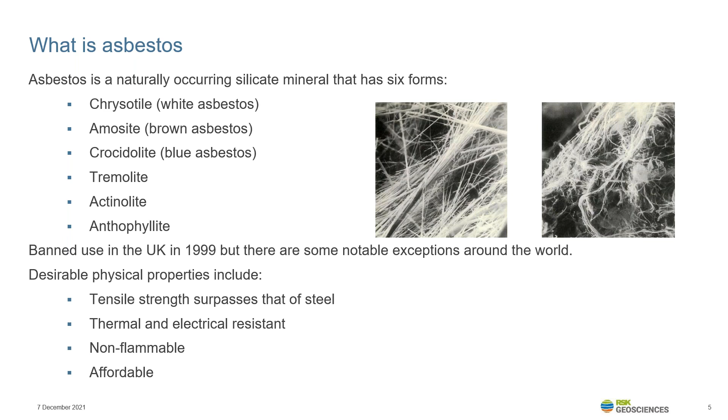chrysotile continued in such features as Artex until its ban in 1999. However, asbestos is still used around the world, for instance in the US, where it seems the financial benefits of using asbestos in cement pipes, for instance, outweigh the health effects. Asbestos has been so popular throughout history and is so widely found today because of its desirable physical properties, which include its good tensile strength, thermal and electrical resistance, fire retardance, and it's a cheap commodity.

So asbestos is a carcinogen, meaning that it's an agent directly relating to cancer. There are three main types of asbestos diseases caused by exposure to asbestos: mesothelioma, which is a cancer of the cells outside the lining of the lungs, and lung cancer, which causes malignant tumours in the air passages of the lungs.

And asbestosis, which is scarring of the lung tissue marked by severe fibrosis. There becomes a risk to human health only when asbestos is disturbed and the loose fibres become airborne, and they enter the respiratory system through either inhalation, ingestion, or direct skin contact.

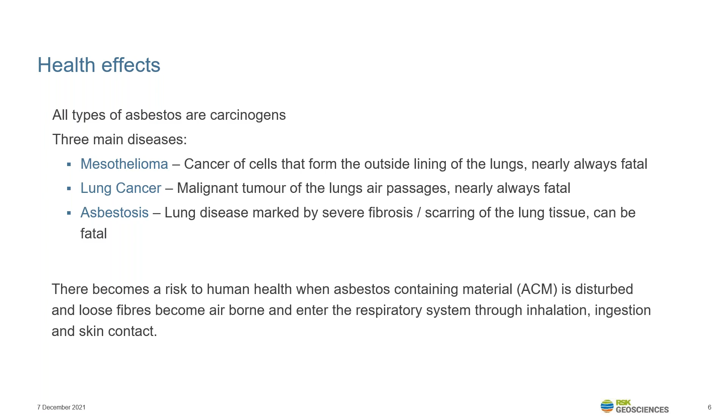So the following legislation all relates to safeguarding employees from encountering asbestos, asbestos-containing materials, during their day-to-day working lives. The Health and Safety at Work Act of 1974 is the primary piece of health and safety legislation in the UK, and it's what governs our methods of work. From this Act, there are several regulations which are part of UK law and place duties on both the employers and the employees to adhere to all safety measures and procedures put in place.

The regulation that relates specifically to asbestos is the Control of Asbestos Regulation 2012. It includes land as a premises, and therefore asbestos in soil is now considered within this regulation, hence the growing involvement of environmental consultancy firms in protecting this particular workforce.

Other guidance documents for use specifically relating to asbestos in soil are produced by various scientific bodies. CAR Soil, produced by CLAIRE in 2016, provides an interpretation of how the regulations within CAR 2012 apply specifically to works associated with asbestos-contaminated soil and construction and demolition materials. It provides guidance on how to implement the requirements of CAR 2012 in relation to site investigations and remediation activities, including a couple of useful decision-making flowcharts.

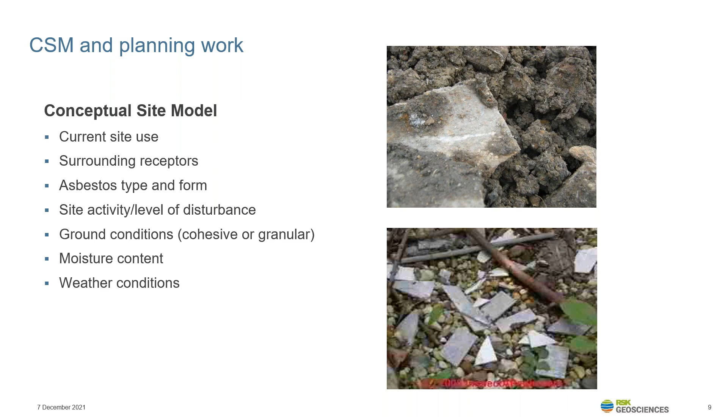Ground conditions should be characterised. Soil that's more cohesive in nature tends to bind asbestos fibres to it, and it's not as easily released. This is also the case with moisture content - water content dampens down the fibres and makes them less releasable, which is also linked to weather conditions. So wetter weather, as you can imagine, dampens down the soil even further, limiting the releasability of the fibres.

So once we have a conceptual understanding of the site, we can then move on to the desk study element to further investigate the potential presence of asbestos. So asbestos-containing materials have been used throughout history in many forms and for many purposes, especially within the construction industry, due to the desirable properties that we talked about earlier.

It reached its peak usage in the UK in around the 50s and 60s as part of various building fabrics. Therefore, it's bound to be present on most, if not all, brownfield sites that we come across today. And that's mainly because the sites we deal with generally contain dilapidated buildings or war-damaged buildings. They've undergone several phases of demolition. There may be deposits of made ground in basements, for instance, and they may have undergone some sort of importation of soil from an unknown source, or even fly tipping.

We're talking about brownfield sites, but we can't rule out the presence of asbestos on greenfield sites as a buried waste. Many old farms contain barns and outbuildings that may have poorly maintained asbestos roofs and walls, and they may also contain fly tipping or burial of asbestos-containing materials.

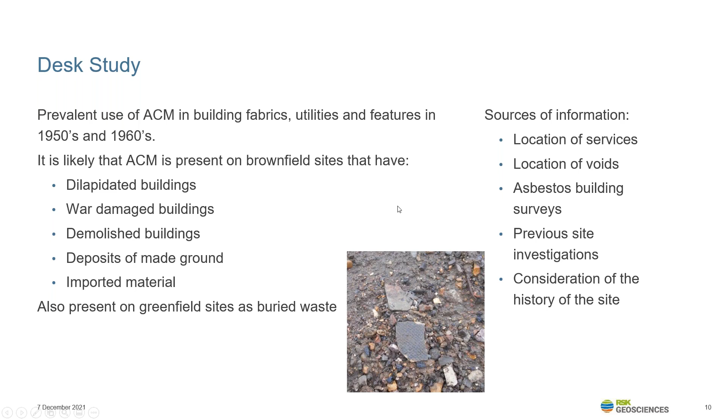Consideration of the history of the site is also extremely useful. Landfills and railways, for instance, are higher-risk sites for asbestos than, for instance, a greenfield site.

The site walkover is a fundamental stage in the conceptualisation of a site and site investigation prep for any contaminant. During a site walkover, it's necessary for all site staff to do certain things which can be taken forward in the risk assessment, such as inspecting the ground surface, any stockpiles of material or fly tip material, and inspecting existing buildings for suspected asbestos.

These instances should be noted on a site plan as suspected, as it's not always the case that we've proven it's asbestos at that stage. On the plan, we should note the location, form, extent and quantity of asbestos we suspect, and also its degradation status, so how well maintained it's been over the years.

Take ample photographs, which is always a necessity for any site walkover, and also note any areas that were not inspected on a site plan, as these may prove to be places where asbestos is present at a later date.

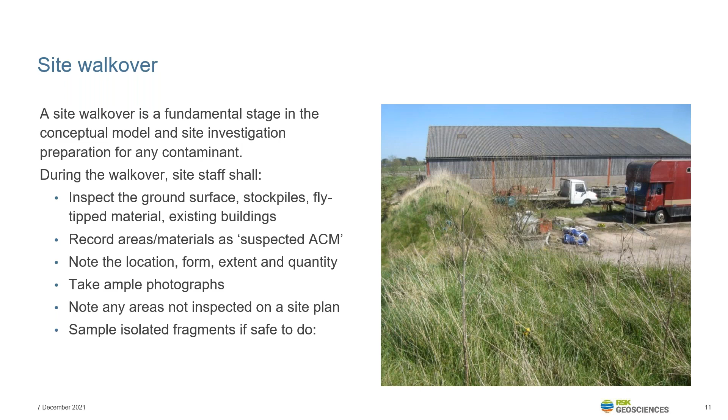We don't readily do it, and there are arguments to support not doing it at the walkover stage, but suspected asbestos may be sampled during a site walkover if it's safe to do so, and we have the correct equipment and PPE.

The site walkover and desk study information can then be used to facilitate the site work planning stage and the production of site-specific risk assessments and health and safety plans. They can also be used when considering the suitability of certain exploratory techniques. For instance, air flush drilling should not be used when drilling through made ground suspected of containing asbestos.

The licensing and notification processes also need to be considered at this stage when planning site work. Generally, there are three types of asbestos work: notifiable licensed work, where it's suspected that the control limit for exposure to asbestos fibres is potentially exceeded, and there is licensable product likely to be on site, such as asbestos insulated board.

Notifiable non-licensed work, which is dependent on the type of work being undertaken and the type and form of asbestos. In this scenario, measures in line with the licensing scenario, where a licensed asbestos contractor is needed, do not apply, but notification to the HSE will need to be done. The third scenario, applicable to most site investigations and sampling exercises we undertake, is non-notifiable, non-licensed work.

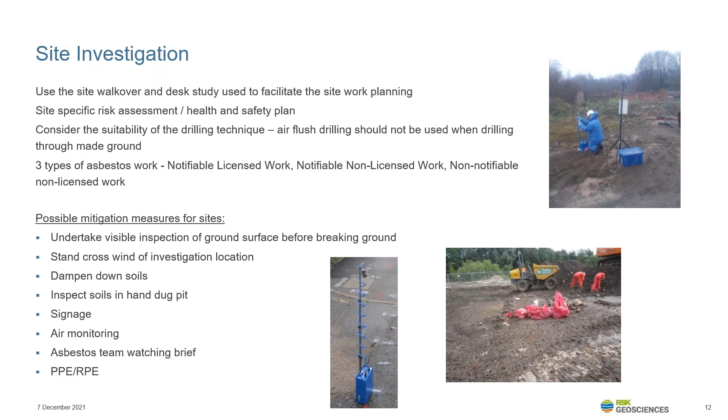RPE and PPE are considered to be the last line of defence, and other control measures should be put in place to minimise fibre release, such as dampening down soils, as we've previously discussed.

RPE, respiratory protective equipment, includes the use of a half-face respirator with a P3 filter. These require face fit testing, so they're specific to the person using them. A full face positive pressure mask with a P3 filter can also be used, again requiring face fitting. Both of these masks require the user to be clean shaven so that the seal between the face and the mask is tight.

PPE includes the use of a disposable paper overall, usually a Tyvek Type 5 or 6 coverall, latex gloves or nitrile if required by the user, and disposable overshoes or Wellington boots. These are used so that they're easily washed off and any fibres don't become entrained in the shoelaces.

On the screen now is a general setup of a site investigation that we've done on a site impacted by asbestos.

As you can see, we've got a water bowser on hand to dampen down the soils, and also clean off any tools that have been used or drill casing so that we reduce the amount of cross-contamination.

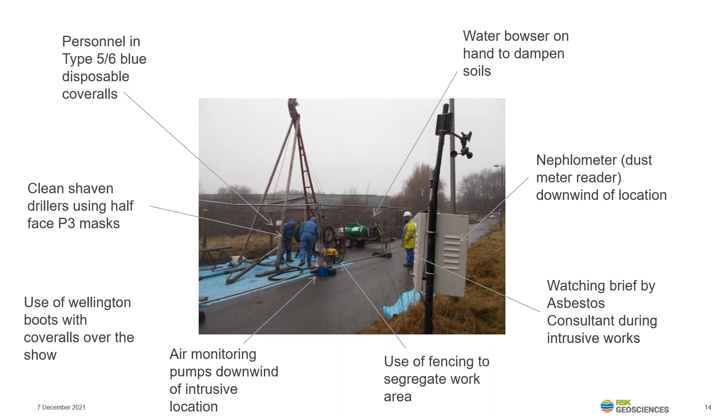Following on from this, we've just got a quick project example: an environmental and geotechnical site investigation at the former Turner Brothers asbestos factory in Rochdale. It's a derelict asbestos manufacturing and processing plant set up in the Spodden Valley.

There's a woodland to the north and to the west, and there's a public footpath that runs right through the site from north to south. The actual factory buildings are in the centre of the site, which are currently structurally unsafe.

Raw asbestos was imported via the railway in the north of the site and was woven and processed at Harridge Mill, which was in the north in the woodland. Any excess asbestos containing product or waste material was literally dumped in the woodland down the slope and ended up either on the slope or in the Spodden River.

There's been several phases of investigation over the years, and there's also been some remediation done in the late 90s. But because of erosion and slope instability, trees have fallen down and there've been several instances of animal burrows, bringing a lot of the asbestos waste products to the surface. Being in a public area, it's of great risk at the moment.

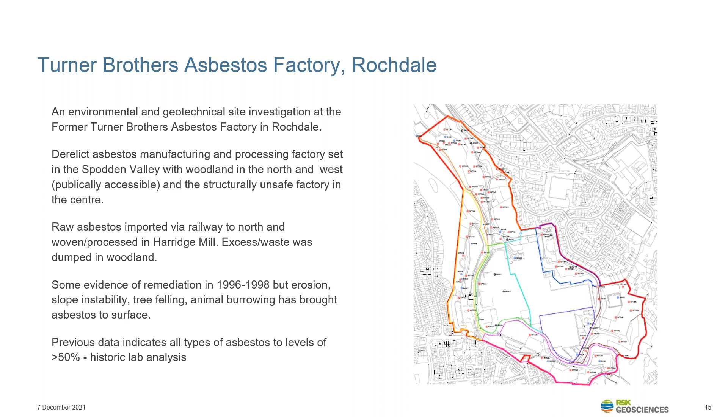We were tasked with undertaking a site investigation to ultimately feed into the end development, which is hopefully going to be a residential development. We put in place several mitigation measures, which are listed here. The RSK asbestos team was on site at all times to watch what was coming out of the soil.

We notified the investigation to the HSE just because of the type of asbestos we were encountering. We did a site walkover prior to the investigation, and all site personnel wore PPE and RPE.

We did some background monitoring to see what the air conditions were like prior to breaking ground, and then we did reassurance and personal air monitoring throughout the investigation. We dampened down the soils and chose to undertake the investigation in winter, so it was a lot wetter. We cleaned off all the equipment between locations.

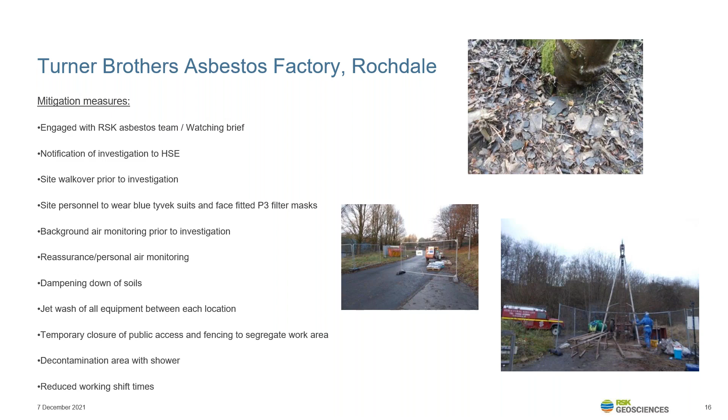We tried to close off the site from the public, but only got temporary closure, so we had to segregate the work areas. We also set up a decontamination area, a shower that all personnel on site had to go through at the end of each working shift.

Following that example, I want to talk about this joint industry working group, the freely available Excel-based support tools produced a couple of years ago to assist with risk assessment mitigation measures. The tool is a series of Excel tabs, and on the first one it allows you to input site-specific details about ground conditions, asbestos type, and air monitoring results, for example.

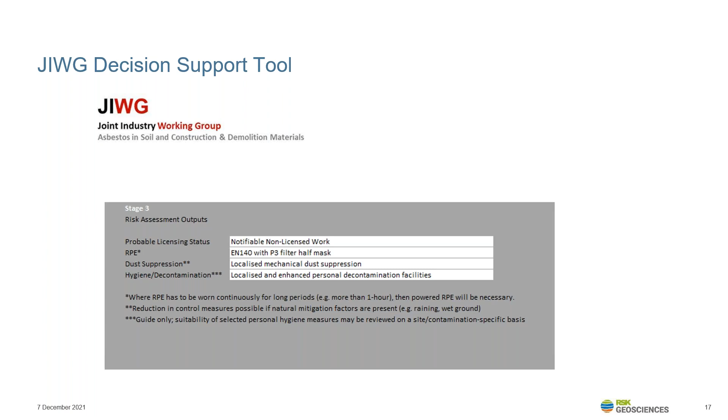It then outputs in this format you can see on screen, giving you a probable licensing status and an indication of the level of RPE recommended, and whether or not dust suppression or decontamination is recommended. They're very useful tools and freely available, so I'd recommend having a look into them.

Moving on from the site investigation stage, we'll now talk about remedial techniques, of which there are many when it comes to asbestos containing soils.

So the first option is to leave it in situ. This is likely to apply when asbestos containing soils are at depth and the public or future contractors are unlikely to come into contact with it. But it's key to consider if future excavations are required in these areas, such as for foundations or for maintenance purposes.

Consideration should also be given to future site usage, so it may not be appropriate to leave it where human contact may occur, such as in residential gardens and utility corridors. In this scenario it would be prudent to use a capping layer, which includes a visual warning or a hard-to-dig layer, for instance.

The leave-in-situ scenario means there is a presence of asbestos on site, and this needs to be documented in an asbestos management plan and undergo agreement from the regulatory agencies.

Moving on to a cover system, which we briefly talked about just then - this is where a clean imported non-asbestos containing material, more often than not with the use of a Terram, as pictured in the top image, is placed over asbestos containing soils. There's no statutory minimum depth, but it depends largely on regulatory approval and the risk assessment, so it can range from 150 millimetres up to 2 metres in some instances.

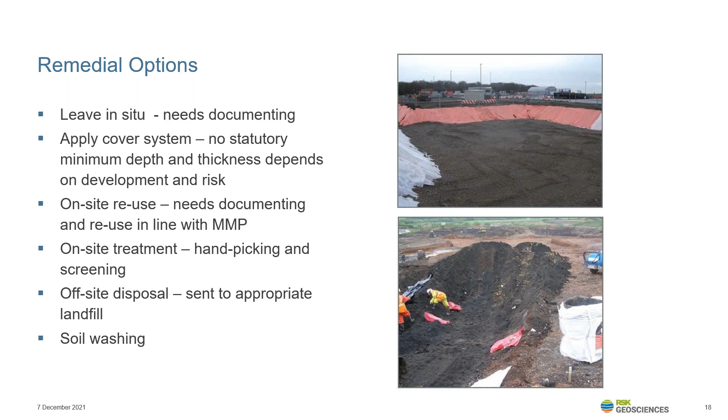Soil washing is an option. I've not heard much about this and haven't seen it in action, but I know some companies do it, whereby they rinse the soil of asbestos fibres. It's largely effective on granular soils, but it does leave an issue of potentially impacted wastewater and waste arisings.

Some of the control measures to be put in place during remediation are very similar to those put in place during the site investigation. You need trained and competent personnel, and you need to demarcate and separate the asbestos removal area as part of an exclusion zone. All personnel should use PPE and RPE as required.

There needs to be proper decontamination of equipment, including vehicles, so having wheel washing locations set up around the site, and having designated entry and exit points, so a one-way system, makes it a lot easier to control. Signage, as we've already said, and consideration for adjacent site users, and monitoring. The monitoring is quite useful to be done in the remediation stage around the site perimeter, but also on personnel who are actually removing the asbestos. And there should be a final inspection by an asbestos surveyor and sign off for re-entry.

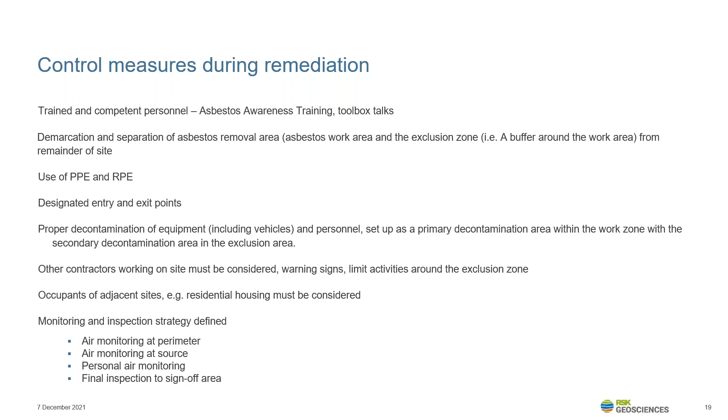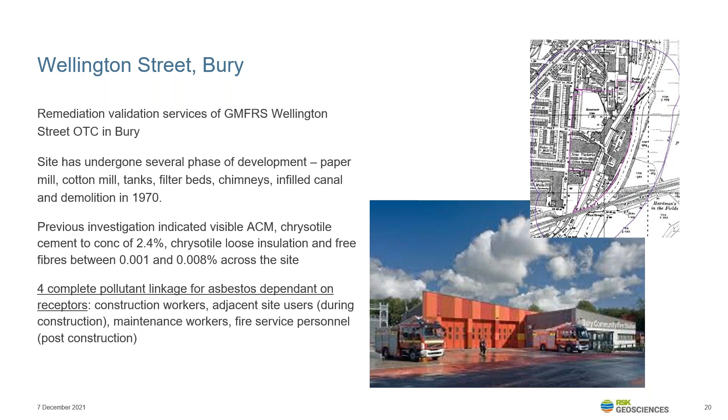A quick example of a remediation project we've recently been involved in was at the Greater Manchester Fire and Rescue Service, their new training facility in Bury. The site had undergone several phases of development before finally being demolished in the 70s. Previous investigations indicated visible asbestos in the form of chrysotile cement, loose insulation and free fibres across the site. So we were tasked with undertaking remediation so that construction workers and future site users and maintenance workers would be safe during the ongoing usage of the site.

On-site activities during remediation included a licensed asbestos removal contractor riddling and handpicking the visible asbestos pieces, and we decided to exclude certain zones as red areas where only certain personnel could enter who were wearing full RPE and PPE. We undertook boundary air monitoring and also personal air monitoring on these workers. We dampened down the soils and undertook regular moisture content testing throughout the lifetime of the removal works. We also undertook a phase of validation soil sampling so that as much of the material could be reused as possible.

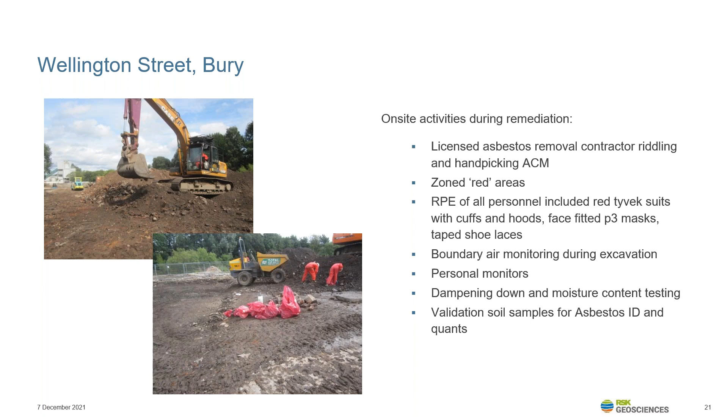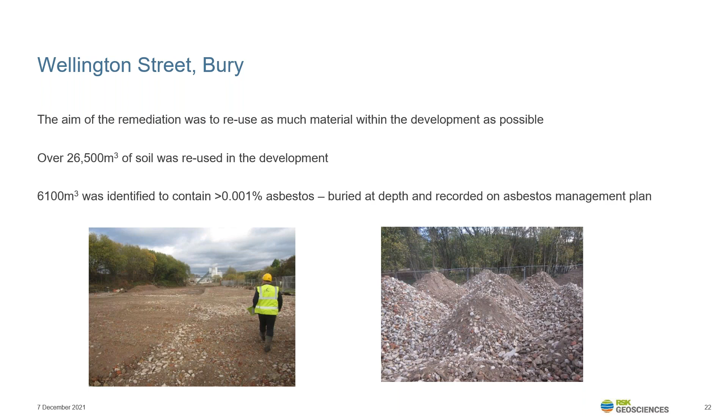So just to summarise, the legislation applies to all work with asbestos, including that undertaken with soil. CAR soil provides some clarity on how the legislation applies specifically to working with asbestos in soil. It's important to understand the conceptual site model in setting up your risk assessments. The Joint Industry Working Group provide these very useful decision support tools to assist with possible licensing and control measures. It's necessary to complete a health and safety plan and specific plans of work, including the location of known or suspected asbestos.

Site staff should undergo asbestos awareness training as a minimum, and we also recommend our staff carry face masks and Tyvek suits as standard in their PPE kits. Consideration of other control measures should be implemented to reduce and prevent the exposure and spread of asbestos.